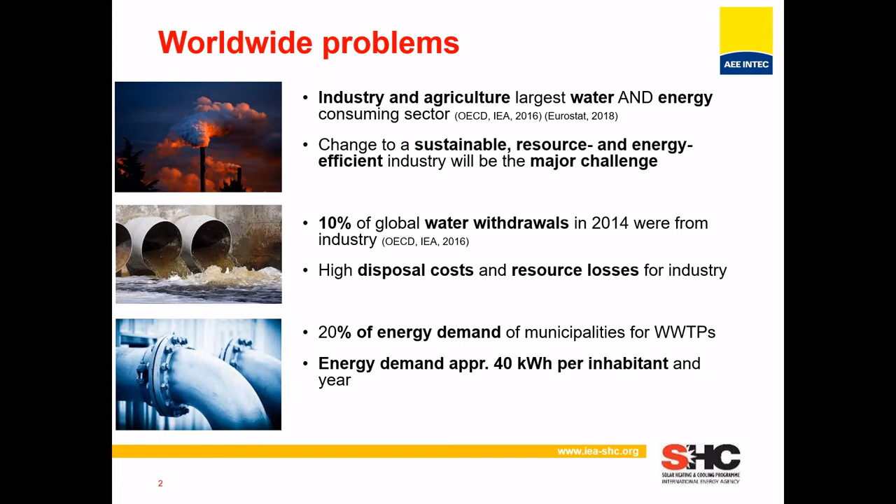An additional 10% of the global water withdrawals in 2014 came from industry, causing disposal costs, and valuable resources are lost during these withdrawals. Also, about 20% of the total energy demand of a municipality - a village, town or city - is allocated to wastewater treatment plants. That's about 40 kilowatt hours per inhabitant per year allocated to these plants. So we thought all these factors are very important to reduce energy demands and to reduce fossil CO2 emissions.

What are the main approaches we are dealing with in our network, within Task 62? On one hand, we see solar energy as a reliable source to reduce fossil CO2 emissions in different applications. We also want to create tools, a good ground to boost markets in solar thermal industry, but also in water purification industry. We have two approaches where we want to use the source sun in general.

On one hand, to use it in the solar thermal area, to use this thermal energy to run different technologies - water purification technologies, water separation technologies like membrane distillation, pervaporation, vacuum evaporation, etc. On the other hand, we also want to use solar photons to deal with or handle wastewater by applying technologies like photocatalytic water purification, decontamination, or disinfection systems. In my talk now I'll focus on solar thermal technologies.

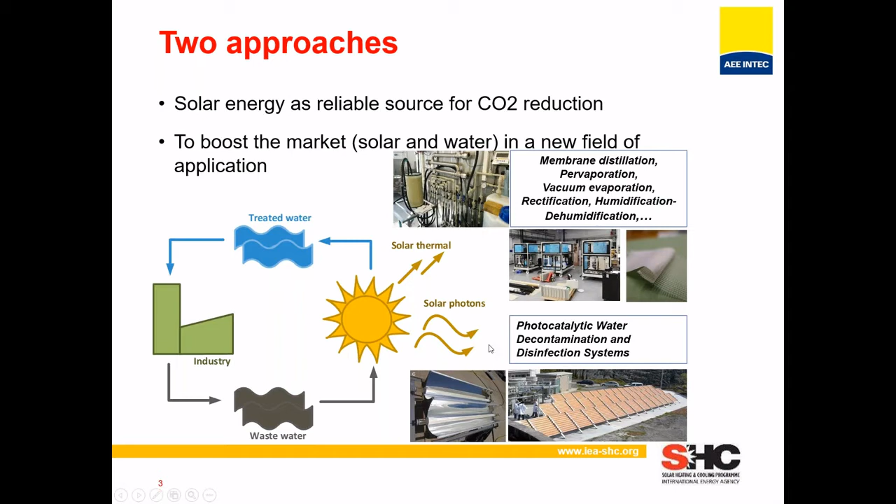After my talk, Isabel Oller, who is also involved in this task as one of the sub-task leaders, will speak more about the solar photon applications.

What are the targeted results? As I said, the title of the talk is this Nexus energy water industry, and the targeted results are also allocated to three areas.

In the energy, or solar, area, we want to develop new solar collector concepts. We want a strong link to solar collector suppliers and developers, so they get new market ideas, and to identify potential markets for the technology itself. On the water side, of course, water separation technologies, decontamination and disinfection technologies - to see how these can be linked with solar applications, and to recycle valuable resources out of wastewater.

And for industry, we want to identify emerging technologies which are not state-of-the-art at the moment but have big potential in the future. We want to create energy and CO2 savings, a guideline for stakeholders will be developed, and we want to identify different integration concepts.

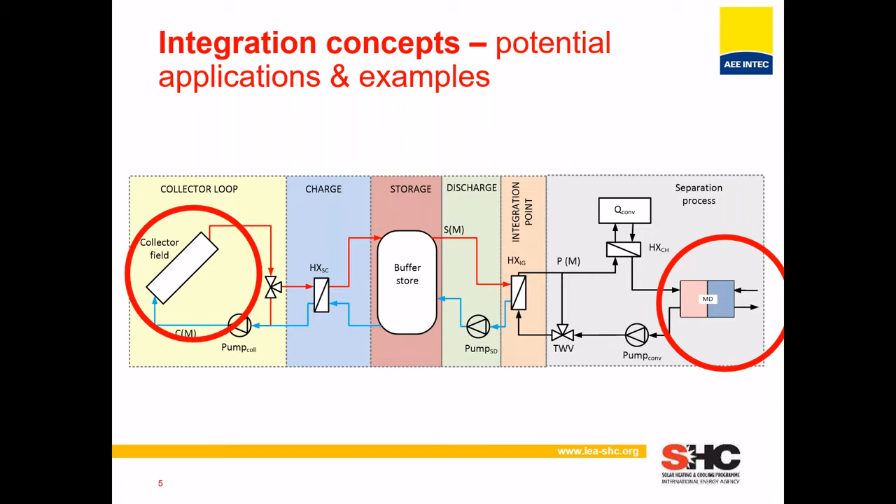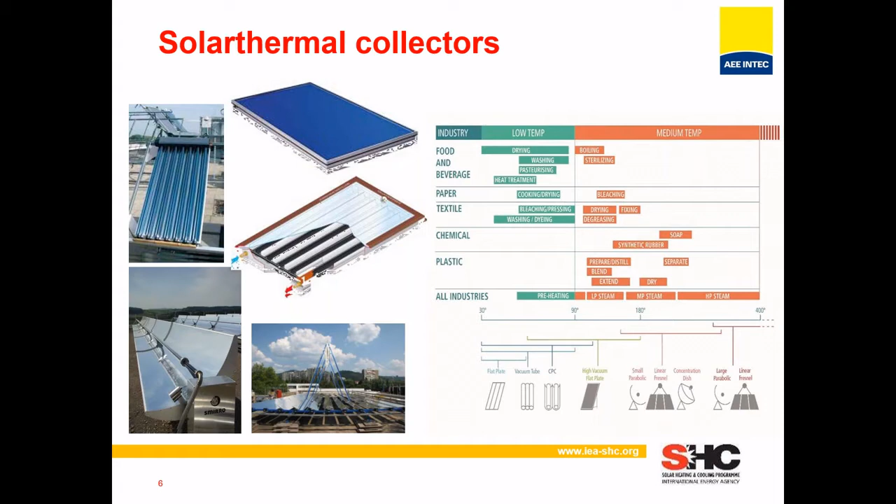For those who are maybe not so familiar with solar process heat, just to get an idea on different collectors which will be applied here. You see already developed collectors - flat plate collectors, vacuum tube collectors, but also concentrating collectors - different collectors applicable for different temperature areas. This is our focus, our technology on the solar side, what we have in our network.

But on the industry side, I think this is maybe not so well known. We identify different applications, different possibilities, different industry sectors where, at first approach, we have the highest potential - galvanic industry, to recover valuable metals, and also to recover acids. We see a big potential for this Nexus application.

Then textile industry, to treat wastewater, especially wastewater coming from the dyeing processes. The food industry, of course, on the one hand, to treat process streams like waste streams or milk streams, to concentrate them and generate, for example, whey powder or milk powder, or also to concentrate juice, but also to recover volatile aroma compounds in different products.

The bio-based industry, as a biorefinery industry, future industry sector - we see big potential to recover this combination of different separation technologies to recover ammonia, to use this as a fertilizer, but also maybe to use it as an energy vector. Additionally, to treat biogas sludge, and to recover ammonia, or to reduce other compounds in this sludge system.

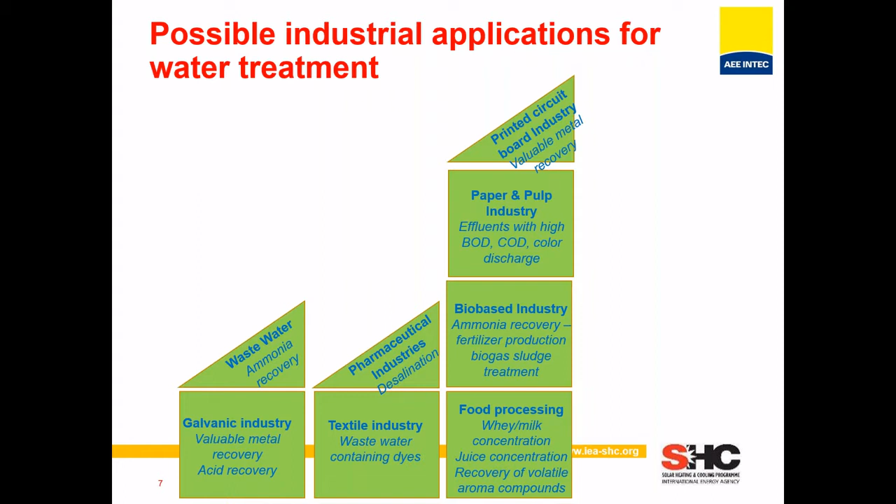Yeah, these are the different applications where we see a huge potential, and I just want to give you a few brief examples.

First example is for the galvanic industry. This is an example from an Austrian galvanic company, and the problem here is that this rinsing bath, or the passivation bath, is full of chemicals, and they get water additionally always into this bath, so they have to add chemicals to keep this concentration in the bath.

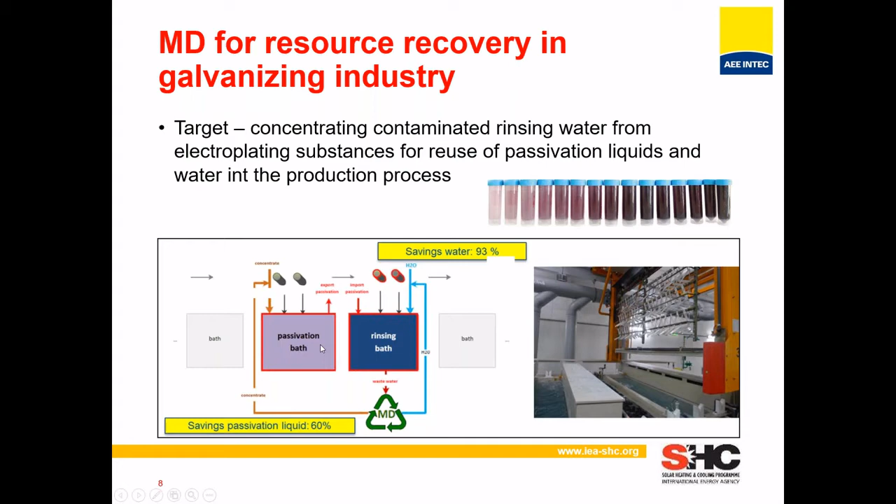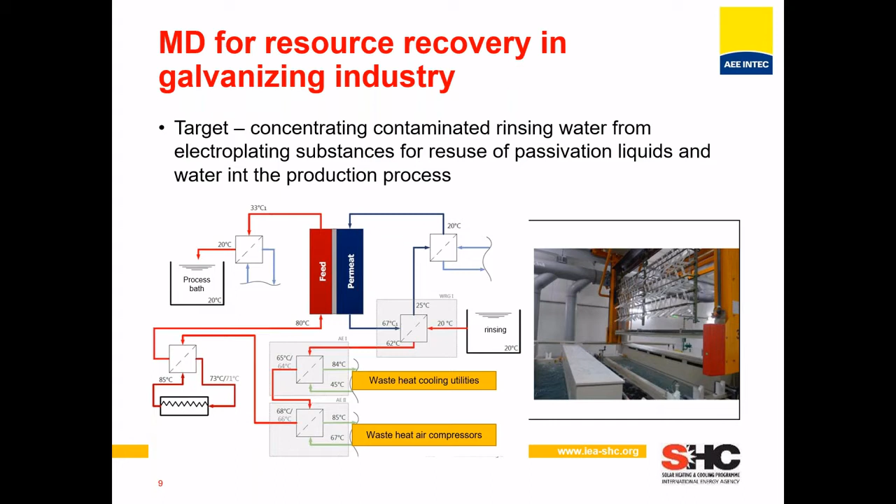We developed a concept, shown here, for how to continuously recover these chemical baths, to separate water out of this bath, generating water on one side, and keeping the concentration in the bath at a constant level. The idea was to combine this separation technology, done by membrane distillation, with waste heat on one hand, but also with solar applications on the other. The results are impressive: about 60% chemical savings and more than 90% water savings, which could be reached in this case study.

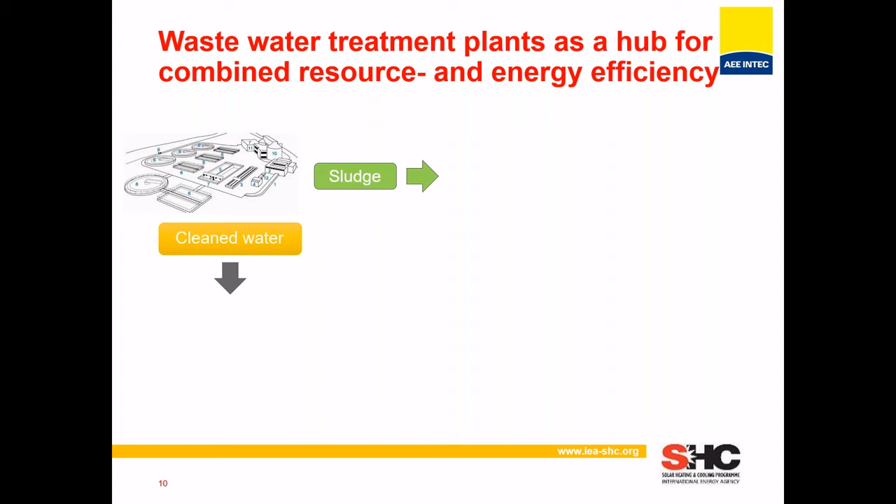The next example: as I told you, wastewater treatment plants are huge consumers, but also have big potential to be future energy distribution points for cities and municipalities. How could such integration of a wastewater treatment plant look like, to develop a concept where it's not a consumer anymore? Of course clean water is the most important part, but we also have sludge coming out of this plant. The clean water leaving the plant has a certain temperature left, and in combination with a heat pump and heat exchanger, a huge potential of energy recovery is possible.

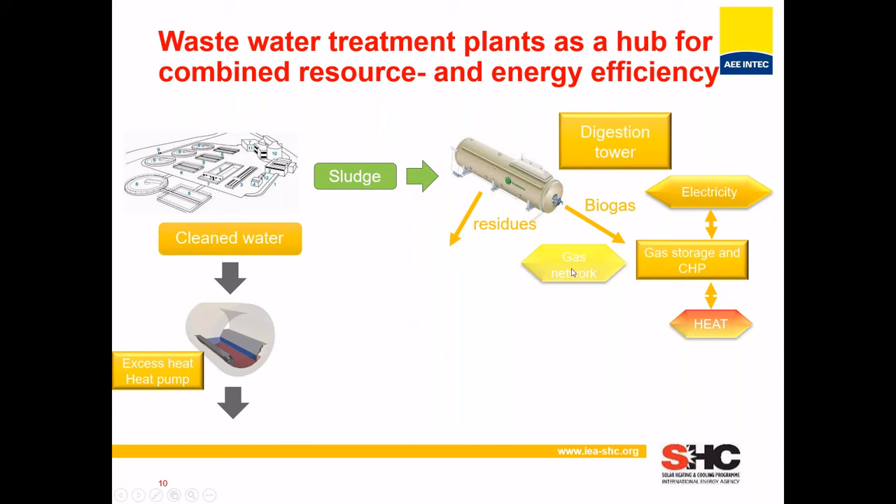The sludge is in most cases already treated in a biogas plant, in a digester tower. Here we have the biogas on one hand, but this is not used very often, and we have the residues out of this biogas plant. What can we do with the biogas? A CHP plant - a combined heat and power plant - can be used, or it can go directly into a gas network.

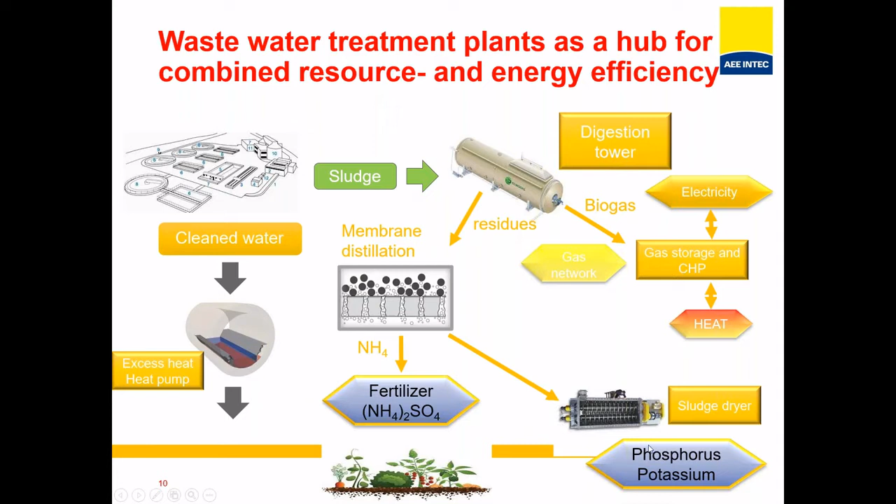Residues can be treated, as I told you already, for example, with a membrane distillation facility technology to create ammonia, use this as a fertilizer. The sludge can be dried and further, potassium and phosphorus can be recovered in this form.

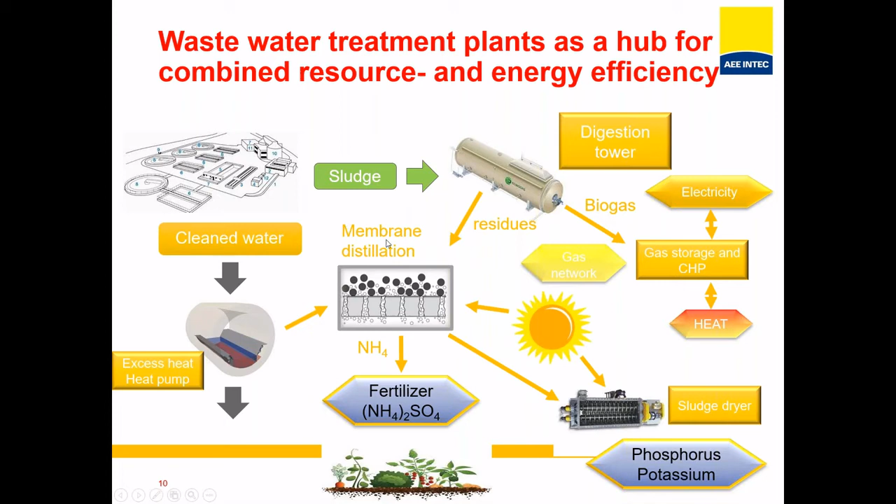And you can see here, solar applications can be applied here in the membrane distillation facility, but also as a solar dryer. It is not only theoretical.

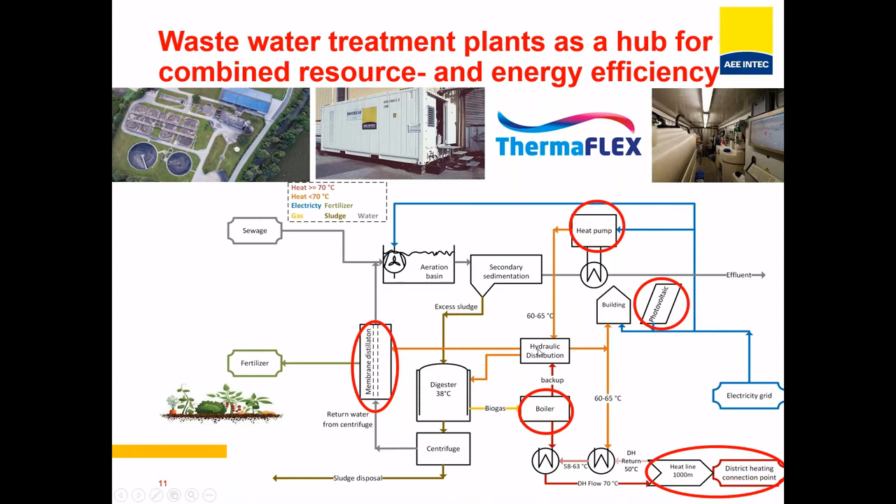We are working here on a pilot plant at the wastewater treatment plant, where, as you can see here, this concept is created with different applications similar to what I showed you before. Here's the heat pump, photovoltaic, membrane distillation, the boiler, and using also the heat for the district heating part.

What is important? What can you reach with such a concept? You can reach up to 20% electrical savings. The yield of biogas can be increased up to 30%, and additionally quite a substantial amount of fertilizer can be produced by separating the ammonia from the sludge.

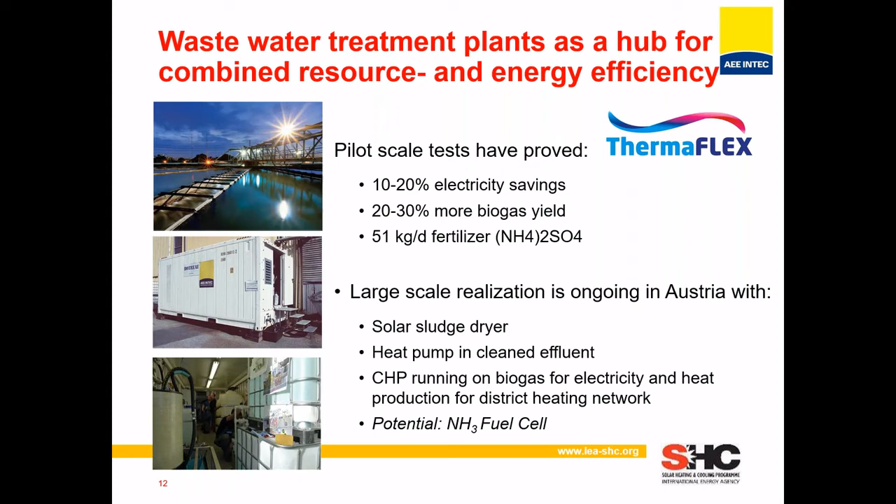And this combination with a solar thermal sludge dryer, heat pump, CHP, and additionally the ammonia can be maybe converted into energy in a fuel cell. So different possibilities. This pilot plant is at the moment in erection and will be implemented in an Austrian wastewater treatment plant.

Coming also to a wastewater treatment plant with additional applications. This is the project Greenlysis, which combines separation water technologies to create hydrogen and oxygen out of the wastewater. It's from a European project, led by a Spanish company and the University of Barcelona.

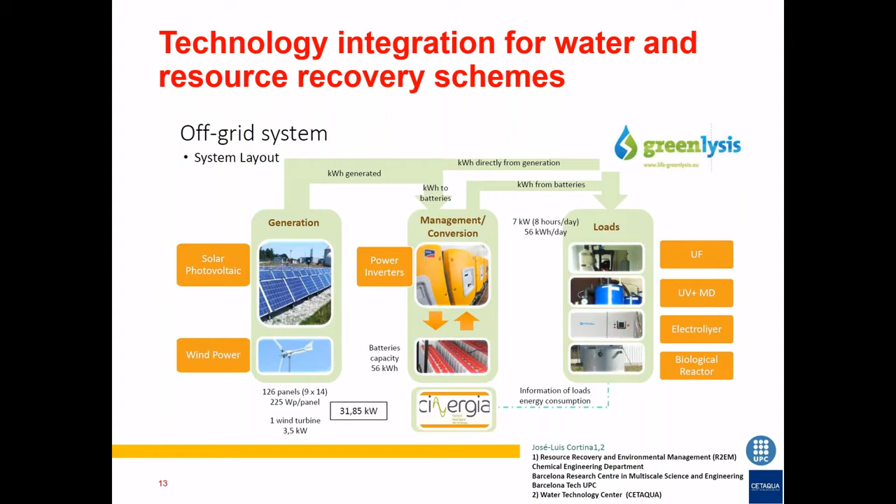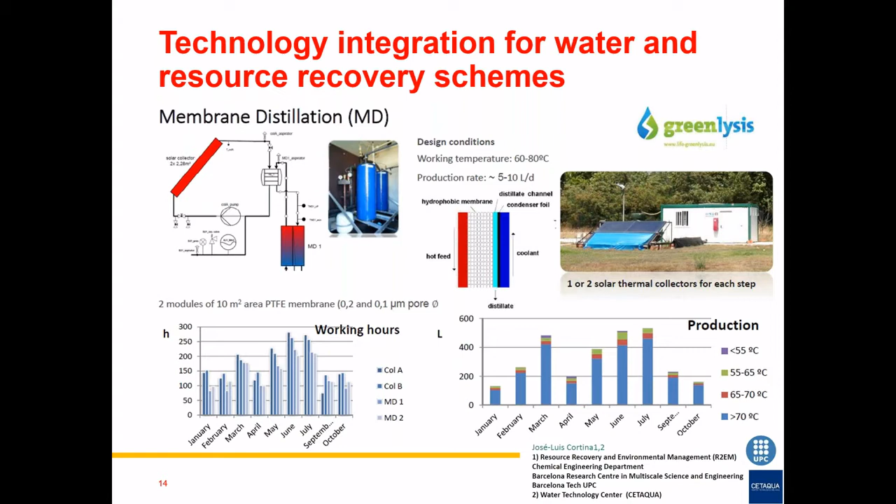With this combination of wastewater pre-treatment, wastewater purification, with electrolyzers implemented, with solar photovoltaics, wind energy, but also solar thermal, together with a membrane distillation facility, which also treats the effluent water out of the wastewater treatment plant, hydrogen and oxygen should be produced, with the potential to integrate this hydrogen in, for example, a methane network. Another quite interesting technology or product is a solar panel or solar collector.

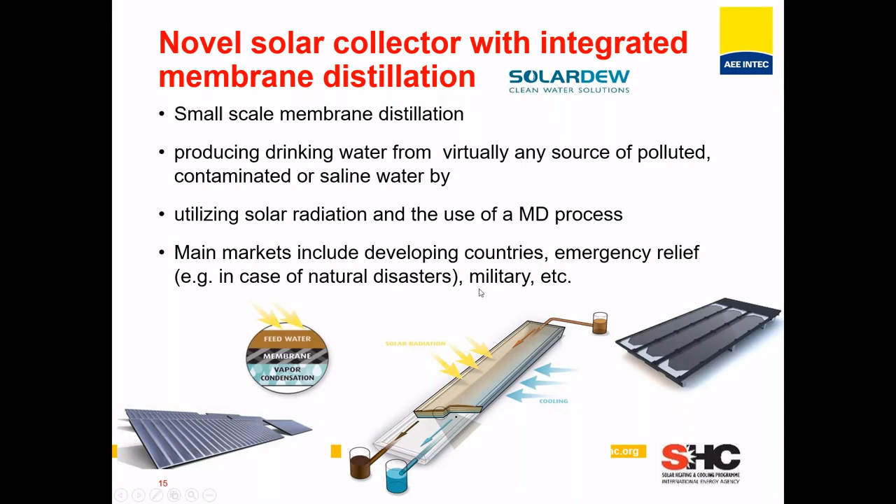The idea here, this product, which is from SolarDew, is to produce drinking water in developing countries, emergency areas, but also for military applications.

My last example is a combination of solar concentrating systems, Fresnel collectors from the company Rioglass, supplying the energy from these concentrating systems for a vacuum multi-stage evaporator, which is a pilot plant running in Spain for wastewater from copper mining applications, as you can see below.

And it is interesting, especially because also here, similar to SolarDew, it is on a modular design basis, so it is easy to scale up such systems on the solar side, but also on the evaporation side.

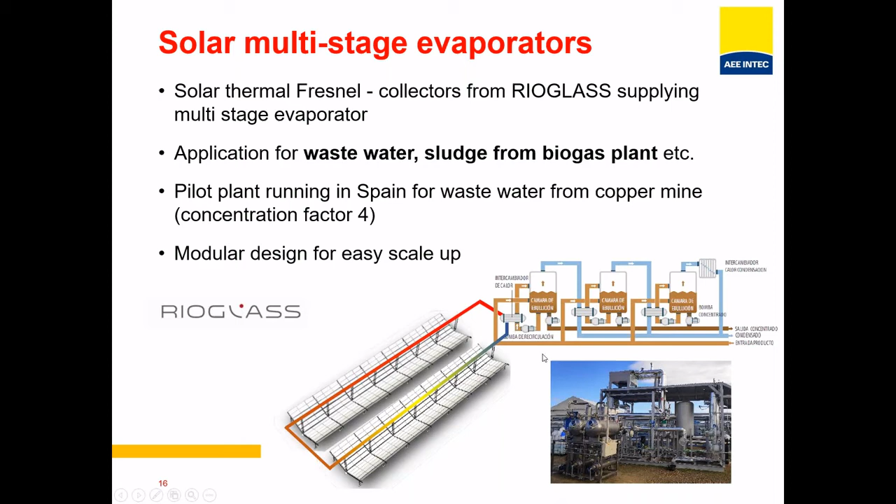Coming to my last slide, what are up to now the most important findings? The nexus of energy, water and industry is very important. I showed you the numbers in the beginning. It's a very important future topic and future strategy to reduce CO2 emissions.

Wastewater treatment plants are promising energy and resource sources. It means it's not needed anymore that they just consume energy. They can produce energy, and they can also produce valuable resources like ammonia or potassium.

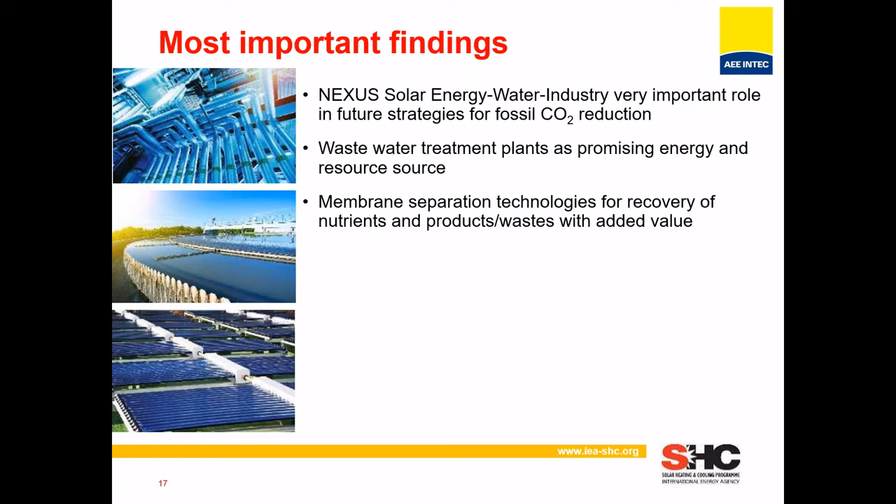Membrane separation technologies for recovering nutrients and other products out of wastewater could be identified and will be under future research, to really select the right technology for the right applications.

New solar thermal collector concepts will be needed, but there are some already on the market, like I showed you with SolarDew. Then also, of course, decision-making guidelines and tools will be important for the future, to disseminate these activities and reach further industry and applications.

And of course, as usual with new technology, best practice examples are very important in order to boost these new realizations and these possibilities, as shown here with some of these examples.

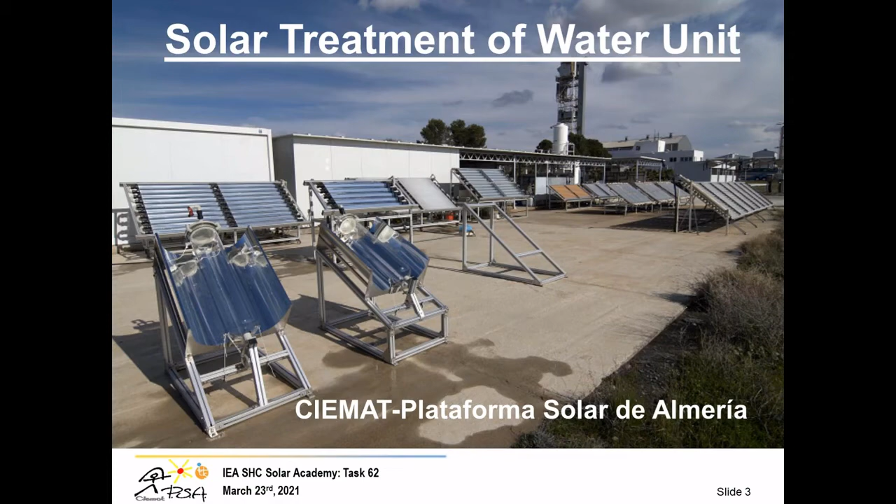I'm the head of this unit now, and these are some of the lines that I would like to share with you that we are focused on in research and development. As you can imagine, like the rest of PSA in research, we are focused on being in the middle between lab scale experiments and demo site experiments and going to the market technology.

We try to focus on solar photocatalytic and photochemical processes as tertiary treatment for removal of pathogens and pollutants in urban wastewater. But we also have a strong research line focused on the integration of advanced oxidation processes and other conventional or advanced technologies such as membranes, ozonation, for hazardous pollutants and pathogens removal from industrial wastewater, while always trying to focus on reducing operating costs and improving water treatment efficiency.

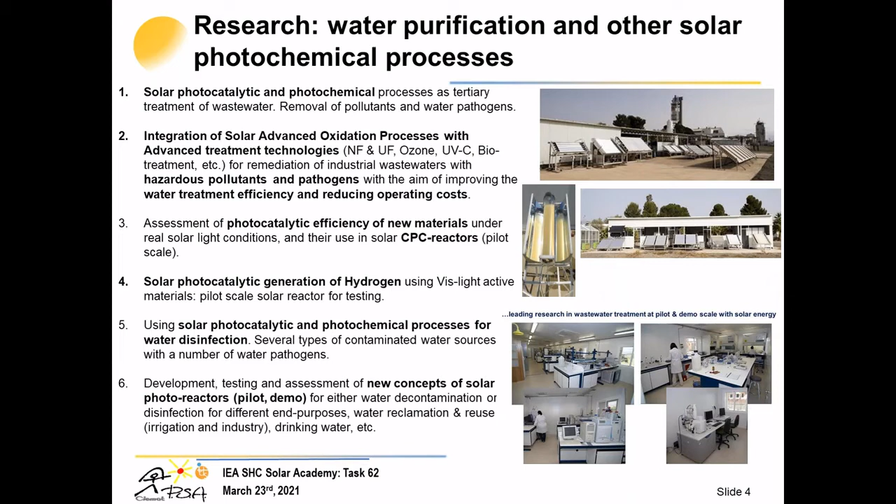We are also focused a lot on trying to develop, design, and test new concepts of solar photoreactors at pilot or demo scale, either for water decontamination and disinfection or for reuse purposes. As you may know, we are living in the southeast of Spain, so we have a lot of water scarcity problems.

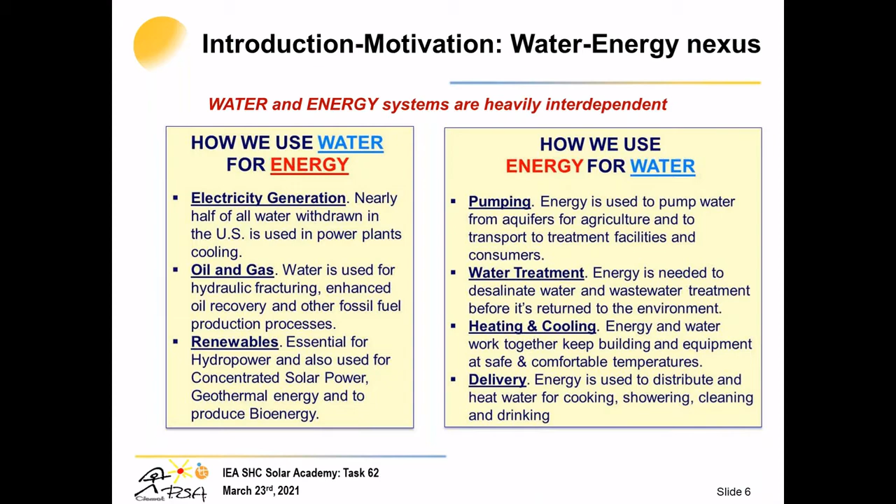So as all of you know, we have the water energy nexus as quite an important issue nowadays. Of course, we use water for energy production. This is something not everyone knows, but we also need energy for water. We need water for producing electricity, even for some renewable energy sources. But we also need energy not only for pumping water or heating and cooling systems and delivering water to the municipalities, but also for water treatment issues.

Indeed, we must know that the water-energy binomy is always present, so problems on one side are always problems on the other side. But there is an important and clear coincidence in the existence of water problems, normally in arid and semi-arid zones in the world, and the availability of abundant solar radiation, which allows us to apply water treatment technologies based on solar energy in those zones.

Of course, we are speaking about these semi-arid or arid zones in which water scarcity is mainly the focus, but we have also problems of water quality, though not quantity, in the north of Europe. So the water technologies I'm going to introduce you are also valid for improving water quality in North Europe, for instance.

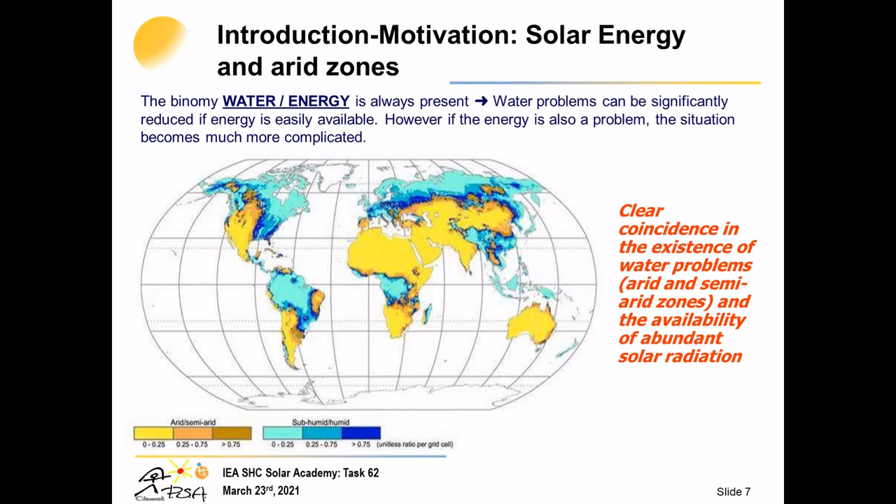But it is not only an issue of water-energy nexus, but also an issue of water-energy-food nexus. I would like to leave you a few words on how the water-energy nexus also affects food. These three sectors are intimately related, and we try to connect all of them always.

And regarding food, nowadays almost 800 million people suffer malnutrition in the world, and it is expected to even increase more because the population in the world is increasing exponentially, as all of us know.

It is also interesting to know that we don't need water only for drinking and for ourselves, but we also need water for producing food. Indeed, for instance, we need 3,000 to 5,000 liters of water to produce 1 kilogram of rice. So it's quite important to always consider this link between these three topics.

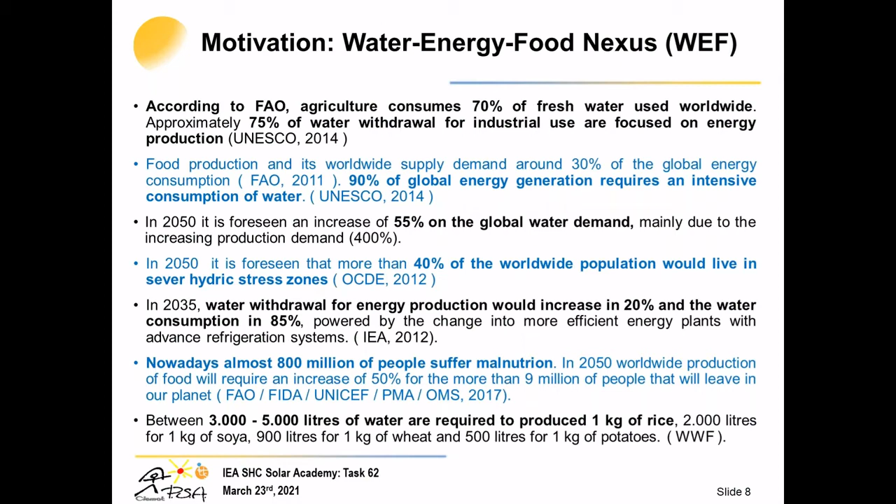Regarding industrial wastewater, which is one of the main contributors to contamination, we know that specific non-biodegradable or recalcitrant contaminants found in industrial wastewater cannot normally be treated by conventional wastewater treatment plants used in urban sites. This causes problems of accumulation of persistent contaminants, even problems in the normal operation of these wastewater treatment plants, and of course low efficiencies due to the toxic or biorecalcitrant nature of the compounds.

So it is important to control the process, but it's also important to speak about and find alternative treatments. Normally, it is necessary to combine and integrate different oxidation processes to improve the biodegradability of industrial wastewater, combining them with biological systems, which are always the cheapest option. Finally, combining both approaches, always trying to focus on a life cycle assessment and health risk assessment, depending on the final use we want for this industrial wastewater once treated—because it can always be treated to a high quality, to be reused not only in the industrial process itself, but even for other purposes in the city, or for irrigation, for instance.

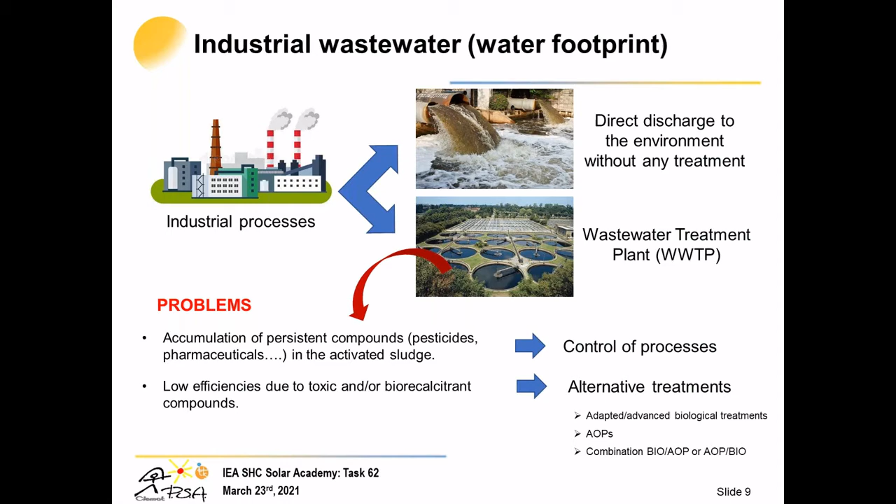But another problem we have is water microbial contamination, because in water, including industrial wastewater, we can find pathogens, bacteria, viruses, protozoa, and in recent days we are facing the problem of antibiotic-resistant bacteria and genes.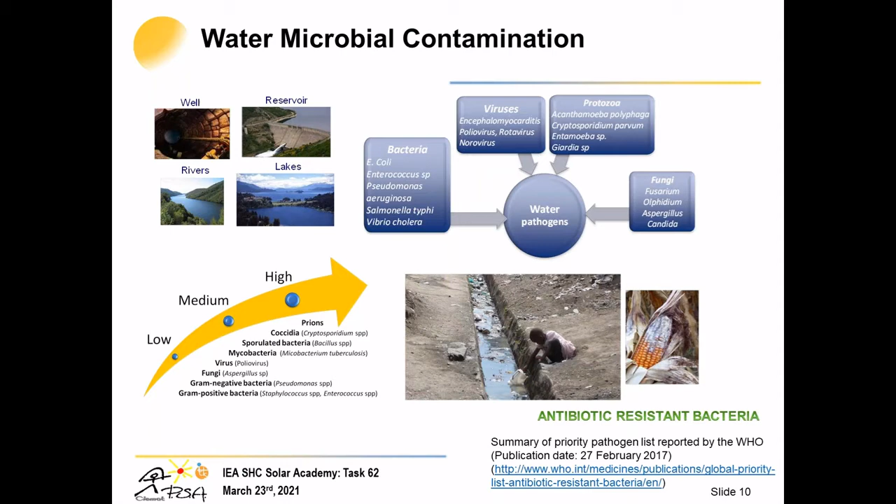In this sense, following the line of Christophe's talk, what we propose are advanced oxidation processes that can take profit of solar energy. These advanced oxidation processes are near-ambient-temperature and pressure water treatment processes. They normally involve the generation of hydroxyl radicals, which are highly powerful and non-selective.

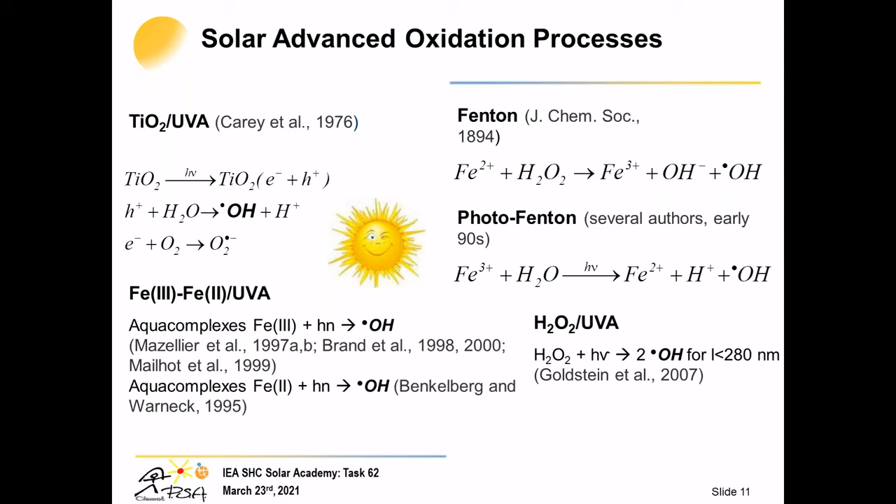So it's always even more difficult trying to combine the thermal and the photon side of this solar energy to take profit for industrial wastewater treatment.

After this physical-chemical pretreatment, we must be clear on how biodegradable and how toxic our industrial wastewater is. Because if it is toxic or non-biodegradable, we cannot go directly to an advanced biological treatment or biological treatment. So we must try to improve the biodegradability of the wastewater through an oxidation process.

It could be a photo-Fenton process, according to the previous slide, which is based on iron and hydrogen peroxide for the production, in a homogeneous phase, of hydroxyl radicals. We can go through ozonation or UV pilot plants, which are more commercially available in the market, or we can go to electro-photo-Fenton or electro-oxidation systems.

But as soon as possible, these oxidation systems are only used to improve the biodegradability enough for going to an advanced biological treatment or to a biological treatment.

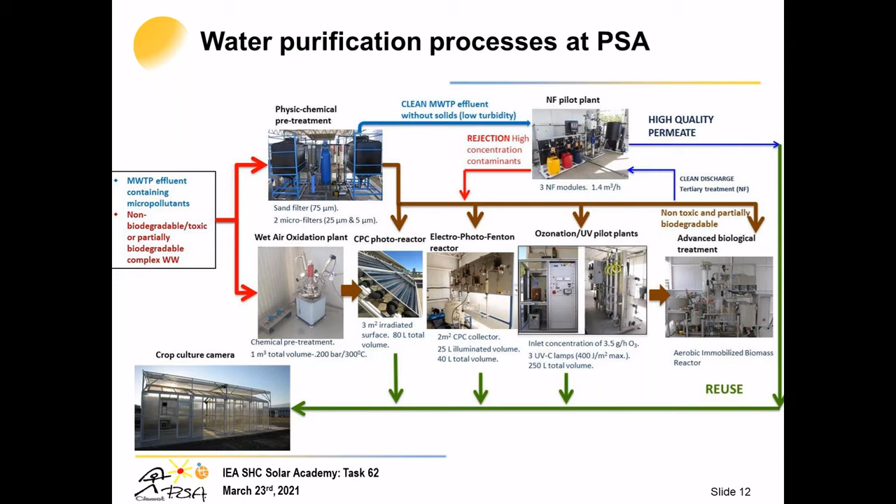So just to present a little bit about the solar photoreactors themselves for this kind of application, some parameters that we must take into account for the design: they must have an efficient distribution of the UV radiation, as we are using the UV, not the thermal part of the solar energy, as I said.

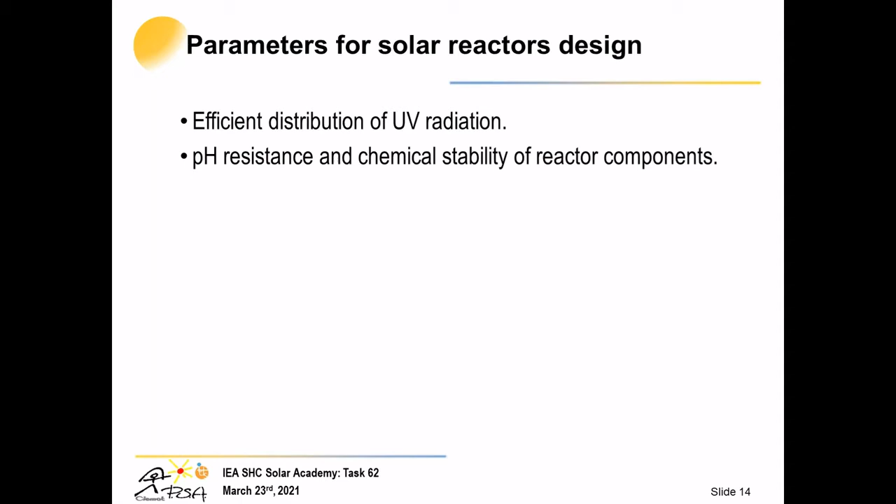They must have pH resistance and chemical stability, because if we are dealing with industrial wastewater, it normally could have an acid or basic pH, so we must be careful about the kind of materials that we use.

The flow must be guaranteed because we need to have maximal homogenization, normally a turbulent regime. It must be resistant, because though we are not concentrating the radiation, if you are in summer you can attain temperatures almost higher than 50 degrees, so it must be resistant.

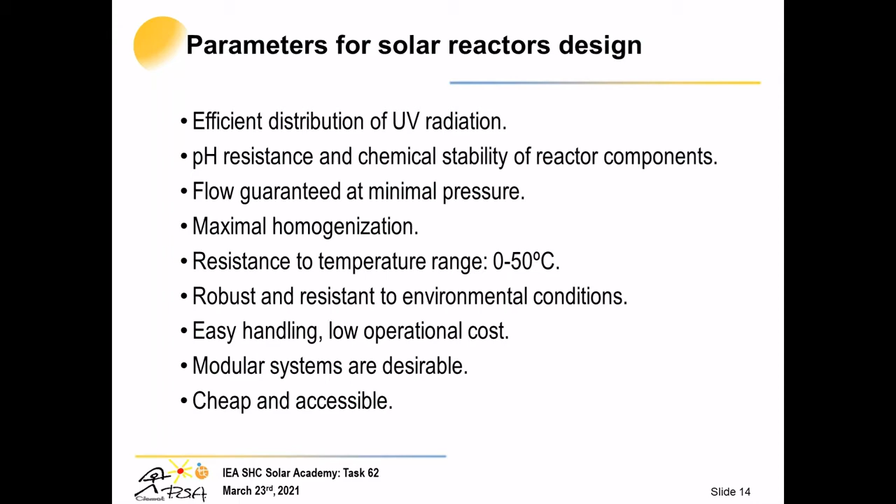They must be robust and resistant, of course, to the environmental conditions. They always need to be easy to handle and have low operational costs. Modular systems are always desirable and, of course, as cheap as possible and accessible.

So now I'm going to present the compound parabolic collectors, which are the most studied photoreactors designed for advanced oxidation process applications. These are static collectors with a surface following an involute around a cylindrical reactor tube. So this is the cylindrical reactor tube, and we have the double involute here.

So the light is reflected by the CPC and is distributed all around the tubular receiver, so that almost the entire circumference is always receiving radiation, wherever the time of day, as you can see in the slides, in the pictures.

So the CPC has a concentration factor of 1, so it is not a concentrated system, and can make highly efficient use of both direct and diffuse radiation. This is an advantage for us, as when we have a cloudy day, we can also take advantage of the diffuse radiation and still perform our experiments and treat the water.

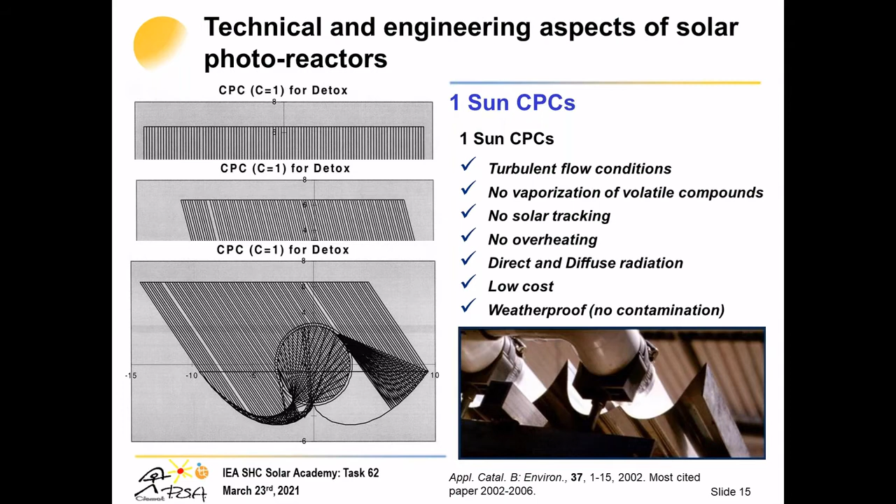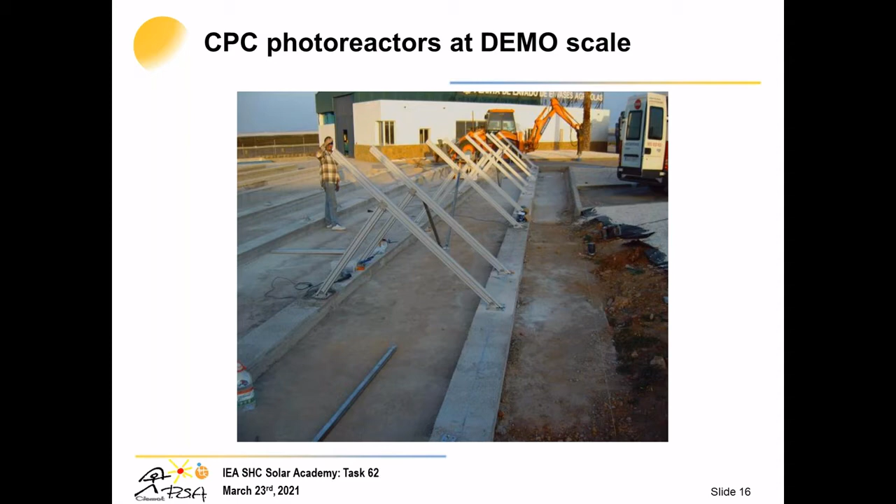Of course, they also have high optical efficiency and high quantum efficiency, which is quite interesting. This kind of photoreactor has also been erected at demo sites, and indeed Christophe showed one picture of one of them in his presentation. Here I show you several pictures of the company that constructed these CPCs.

I will show you a few more details, but another important thing I want to stress in this slide is the row separation. We must take into account that we are facing south, and depending on our latitude and where we are, we must account for the shadow we might cast on the other module of the CPC. So this is an engineering consideration.

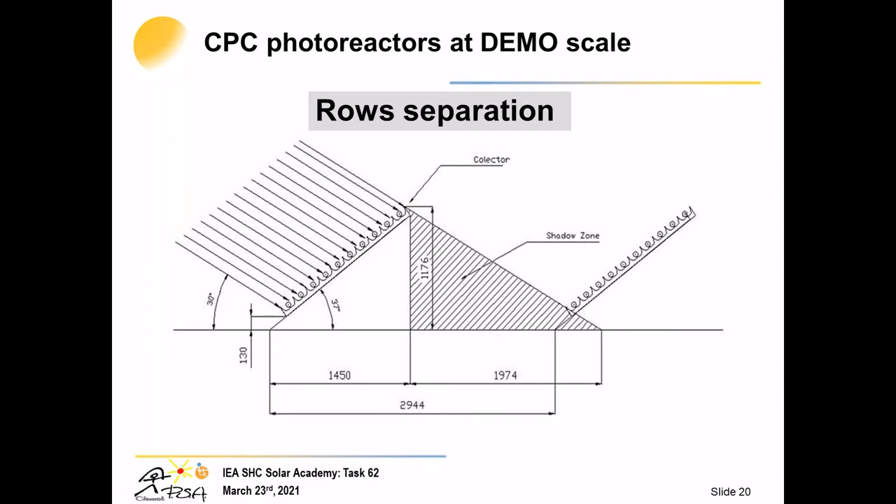So this is the final picture of the pilot demo site that I've been showing in the previous slides. It's around 100 square meter modules of the CPC.

This has been installed in a company in which we wanted to treat the wastewater coming from the rinses of the pesticide sprayers that were used for the crops, the pesticides in the crops here in Almeria.

Here we have how we calculate the area. We are always focusing on trying to determine the minimum UV radiation that we require for treating the amount of wastewater. With that, we design the surface that we need for the compound parabolic collector modules. We already have demo scale systems on this.

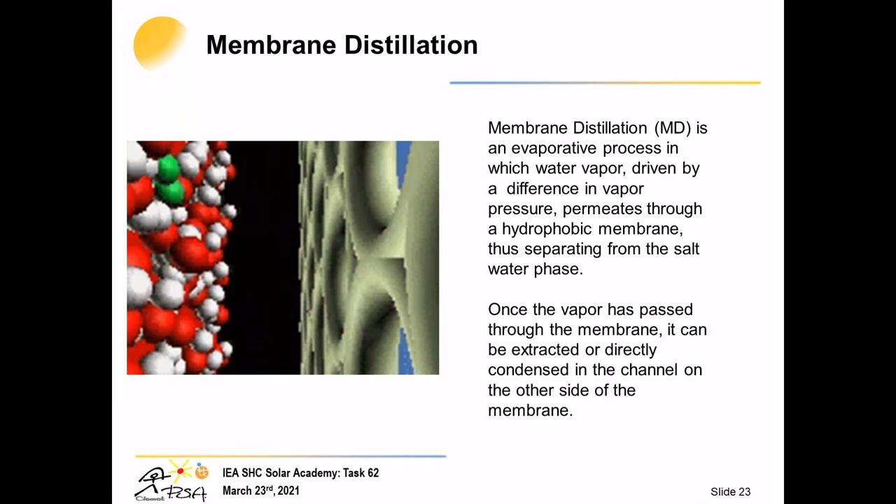I'm not going deeper on this because the nutrients recovery has been explained by Christophe. In the case of membrane distillation, we are always speaking about taking advantage of the thermal energy coming from solar radiation. But we can also recover the ammonia.

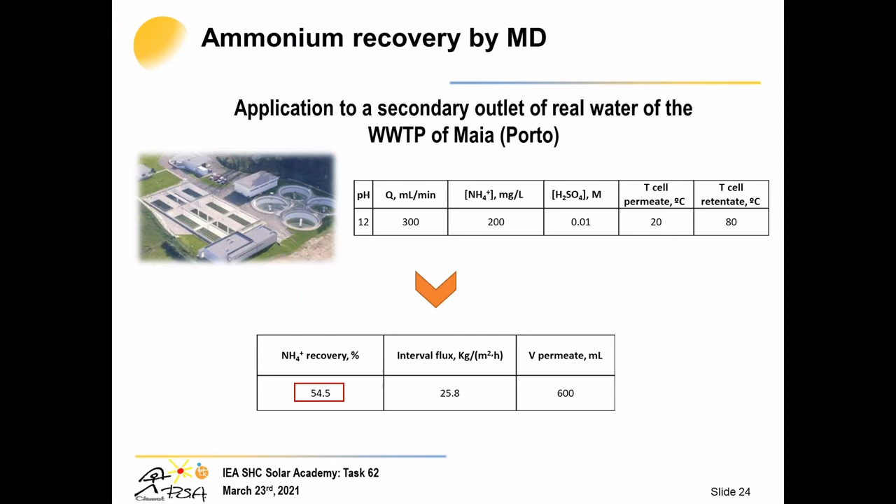As far as I know, good recovery of ammonia is obtained at lab scale, though at pilot scale it's still under development, and also demo scale, as Christophe showed us in several European projects. So let me use a few minutes to show you some examples.

These are typical industrial wastewaters, let's say from our side, landfill leachate. We can have different landfill leachates depending on the landfill site, it could be urban, but it could also be industrial. So we always try to give a treatment line in which we combine the physicochemical pretreatment, as I told you before. In this case, we did a conventional physicochemical pretreatment.

We attained a good reduction in color, which is necessary if we're going to apply a solar treatment afterwards. We did an initial dosage of iron 3 that favored the coagulation, but it was also favorable because we had a remaining amount of 56 milligrams per liter of iron, which allowed us to perform photo-Fenton processes without extra addition of iron. So we used what was initially required for the coagulation and flocculation system.

Finally, we tried to improve the biodegradability and reduce the toxicity, attaining a reduction of toxicity from something like 85% to 14%, and we improved biodegradability. This is only an indicator: as soon as it is higher than 0.3, the wastewater is highly biodegradable. So finally, we combined the physicochemical pretreatment with a solar photocatalytic photo-Fenton process, followed by a biological treatment.

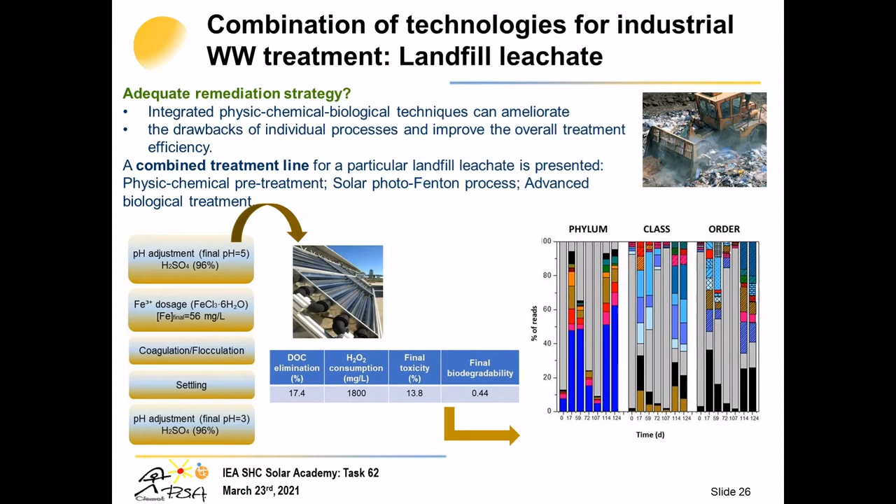This is a picture obtained by genetic analysis. Here, it's important to know that what we observed is that we had Proteobacteria, a kind of bacteria that includes a wide variety of pathogens, such as E. coli, Salmonella, or Vibrio. These were the main microorganisms that were increasing in this adapted biological treatment.

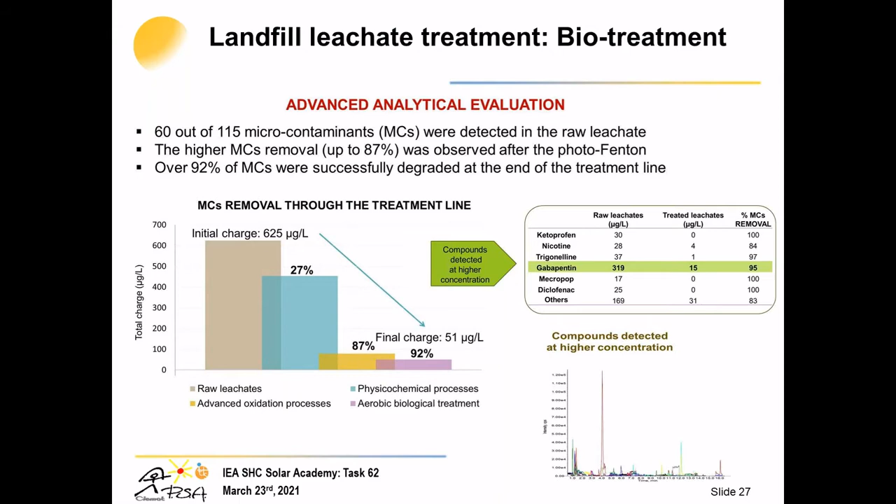So it's quite interesting that we can also apply advanced analytical tools to check which contaminants were initially present in the raw wastewater. And if we combine liquid chromatography with mass spectrometry, we can identify unknown microcontaminants, and also evaluate how we eliminate them in the different steps of the treatment system.

Isabel, can you come to an end, please?

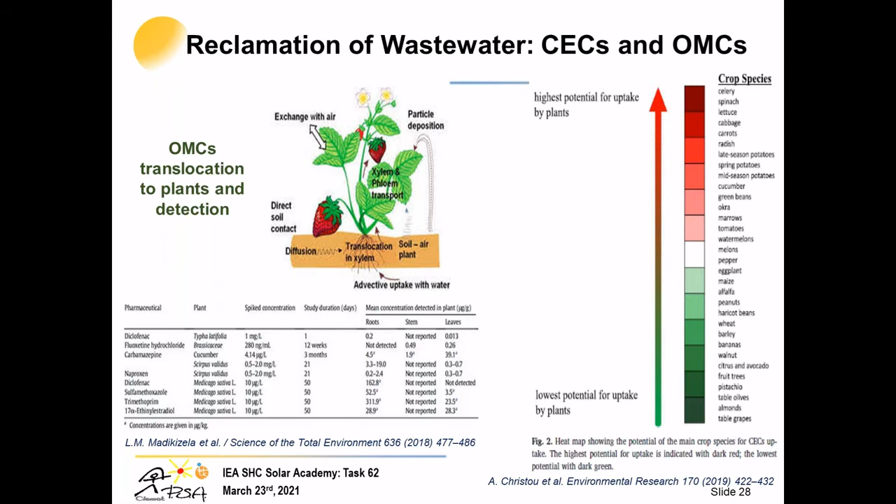Thank you. Yeah, it's only two slides more, just to let you know the importance of the presence of microcontaminants in the effluent when we want to irrigate crops. Here I want to leave you a few reports on that, showing the potential. It's only to show you how we treat with this system: solar energy with hydrogen peroxide and also iron for the production of hydroxyl radicals.

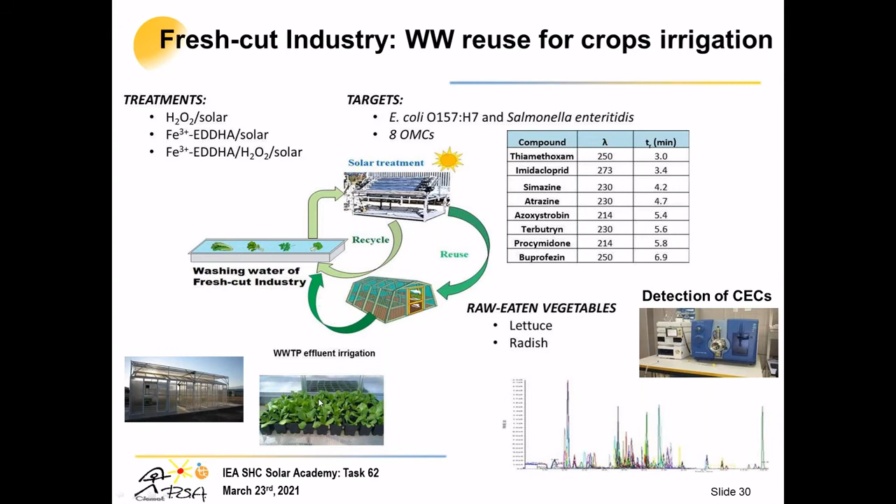And then we can reuse the own wastewater, even eliminating disinfecting and eliminating the salmonella and the E. coli. We can reduce vegetable crop irrigation issues, and we can eliminate the presence of these contaminants in the water, so we can irrigate without problems.

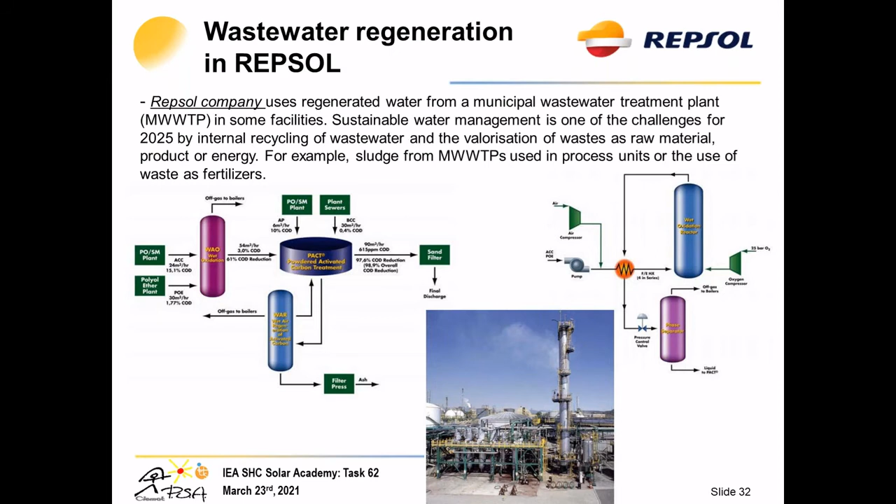This is the example of Repsol, just to let you know that there are some industrial companies that have their own wastewater treatments. We have a deliverable in task 62 where you can revisit these examples of industrial companies investigating their own wastewater treatment plants.

Finally, the key message I want to leave you with is how efficient solar advanced oxidation processes can be for all kinds of industrial wastewaters. But we must always be careful to ensure a safe reuse of the wastewater depending on the final purposes, and always do a life cycle assessment and a health cycle assessment to decide the best treatment technology.

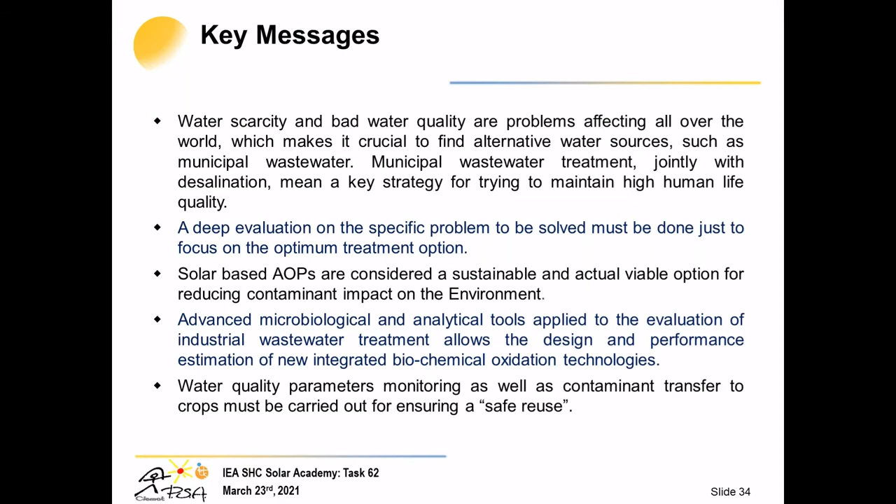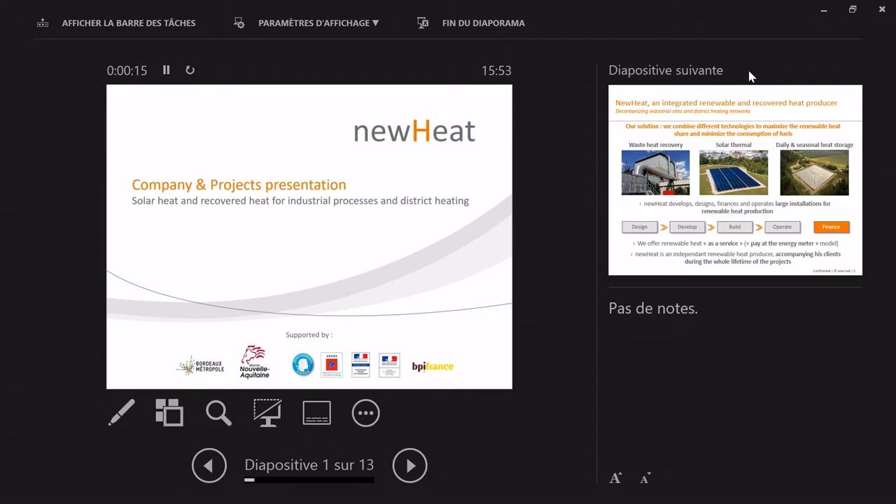I would like to thank you also, Christophe and Isabel, for their presentations, it was really interesting. In my presentation, I would like to show you a bit of newHeat company and the projects we develop first, and then I will end with the R&D project ReMiniWater that addresses solar-powered water reuse and resource recovery in the mining industry.

So, okay sorry, I can't move my screen. newHeat is an integrated renewable and recovered heat producer. Our solution is to combine different technologies to maximize the renewable heat share and minimize the consumption of fuels.

As you can see with those three pictures, we want to combine waste heat recovery, solar thermal, and daily and seasonal heat storage to address the needs of our potential clients. That can be industrial processes, district heating networks, or even greenhouses.

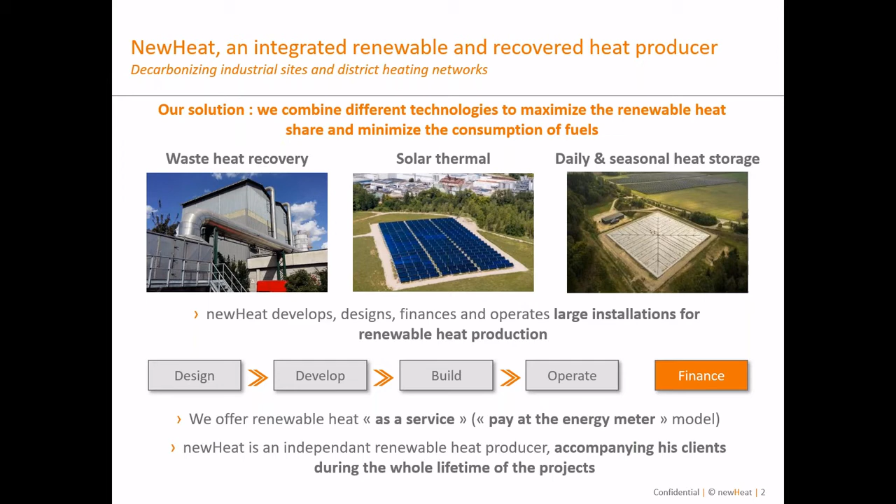Once the need of the client is well defined, we can enter the design phase, to really propose something to the clients that could be a good solution for their needs. Once we have finished the design, we can follow with the manufacturing phase and also the operation, because newHeat, as I said before, covers the whole lifetime of the projects: first manufacturing the solar plant, and also operating it, because newHeat will invest in the plant. So we are the owner, and the client doesn't have to invest in anything before we sell them the heat.

Then I will present a bit of our technical know-how. Our know-how is to design tailor-made solutions to ensure competitive heat price with a secured and metered energy delivery. We first define the most robust, efficient integration to industrial processes or heat networks, and then we select the most appropriate technologies and optimize the sizing of the production units.

The technologies for newHeat are mostly flat plate collectors. We use direct and diffuse irradiation to heat water. For the flat plate collectors, we can either use fixed collectors or tracking systems, to follow the sun throughout the day.

And finally, we design and execute an optimized control strategy for complex heat systems, in order to really supply heat to the demand according to the sun resources, and also to the demand of the client that can change throughout the day and throughout the year. The problems of overproduction can be dealt with heat storage.

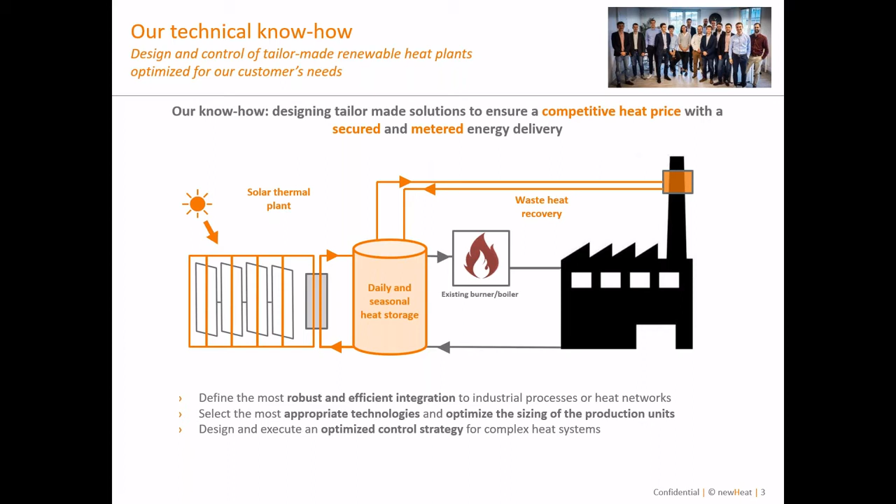In this slide, I will present the key benefits for our customers. First is to reduce the energy bill, because our clients have a specific heat price depending on the gas or fuel they use to heat their processes. Also, as we use solar thermal solutions and other renewable heat production systems, the idea is to decrease their CO2 emissions. We don't entirely suppress it, because as we use solar energy, we are really dependent on the day and on the solar resource. So in general, the current boiler is conserved as backup when needed, but its fuel consumption is deeply reduced.

Also, we stabilize energy costs for the clients. As you can see on the left of this slide, this graphic represents the heat price for the customer with fossil fuel, comparing to the newHeat price. As we sell our solution to clients for 15 to 20 years, we can really smooth the price so the client can have great sight on what he will pay throughout the next 15 or 20 years. And as newHeat is the project investor, the client doesn't have to invest anything, and the heat is delivered to the client thanks to a heat purchase agreement. So everything is borne by newHeat - the study, the investment, and the operating cost.

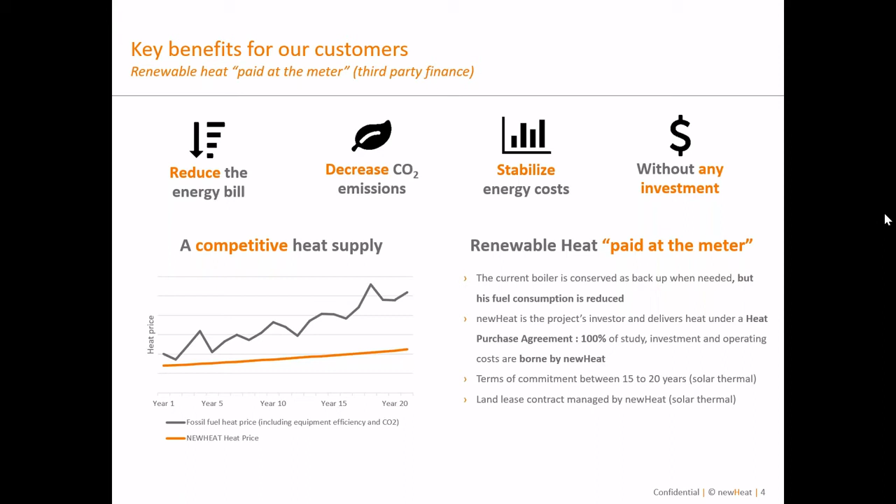Just to present some recent news, we achieved a really important step for the newHeat company that demonstrates the competitiveness and robustness of newHeat's approach and projects. We closed a bank fundraising for 5 solar thermal and recovered heat assets for 28 thermal megawatts, and 15 million euros of total investment. This fundraising is

thanks to two specific investors. First, it was some banks who financed this fundraising - Triodos Bank and Crédit Coopératif - but also some regional funds, 3 regional funds from France for 2 million euros total budget.

This means a lot for newHeat because it really emphasizes that our business model and the work we do is recognized and is worth it, because as a company, we really want to not just propose some new technologies to the clients or new solutions in renewable heat, but also to be competitive against fossil fuel consumption. So it's really meaningful for us.

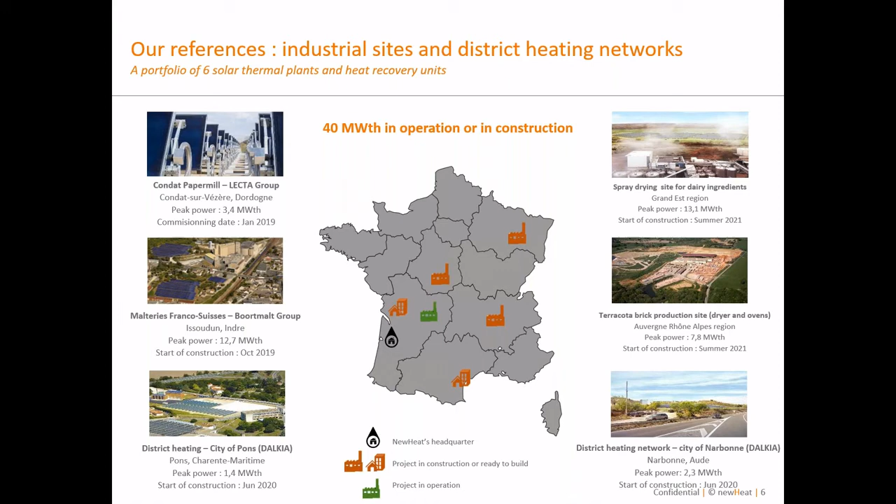Okay, so if we go in more detail in this project, the Condat paper mill is the world's first large solar thermal plant using FPC with tracking systems. These collectors will follow the sun throughout the day.

Production started two years ago, and as we've seen over the last two years, it's been meaningful for us because it's working quite well, even though demand on the site has been quite variable, notably due to the coronavirus crisis.

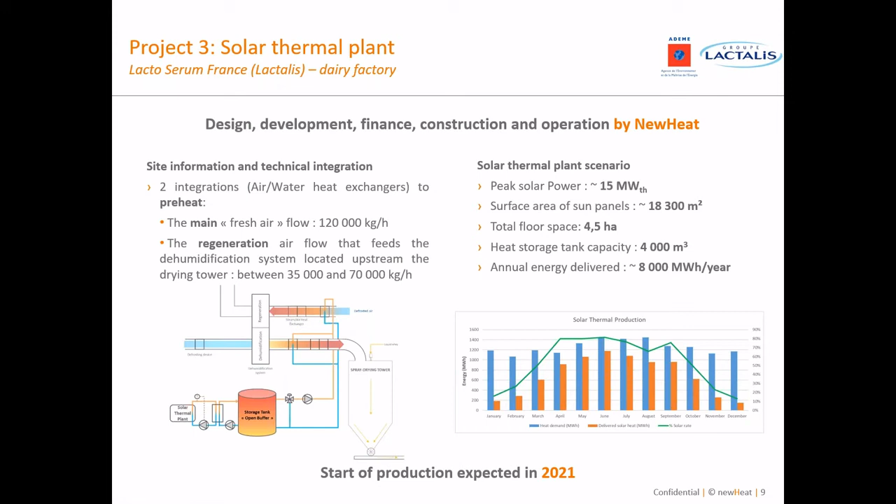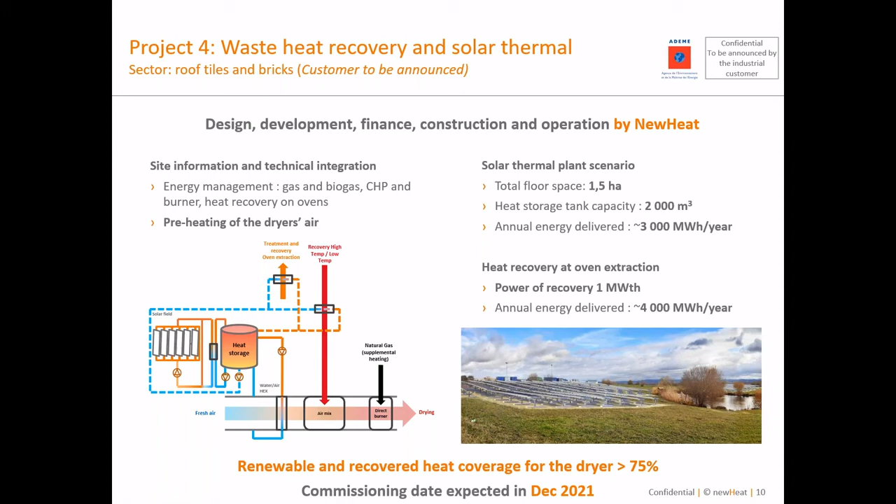The renewable and recovered heat coverage for the dryer should be higher than 75%, so we will address most of the heat required by the plant. The commissioning date should be at the end of 2021. Now that I've presented NewHeat and some of our projects, coming and already operating, I'd like to present the REMINE Water project.

It's an R&D project in which NewHeat is taking part, about solar-powered water reuse and resource recovery in the mining industry. With this link, you can check more information if you're interested, plus some basic information about the project.

The funding is from the European Union's LIFE program funding instrument. The budget is around 1,800,000 euros, and the duration is 2 years, starting October 2019. This project will end at the end of this year. There are 4 partners for this project.

Two partners are from Spain: Cetaqua Water Technology Center, and Matsa, which is a mining company the project is building for. There's also an institute from Poland specializing in non-ferrous metals, and finally NewHeat is participating in this project.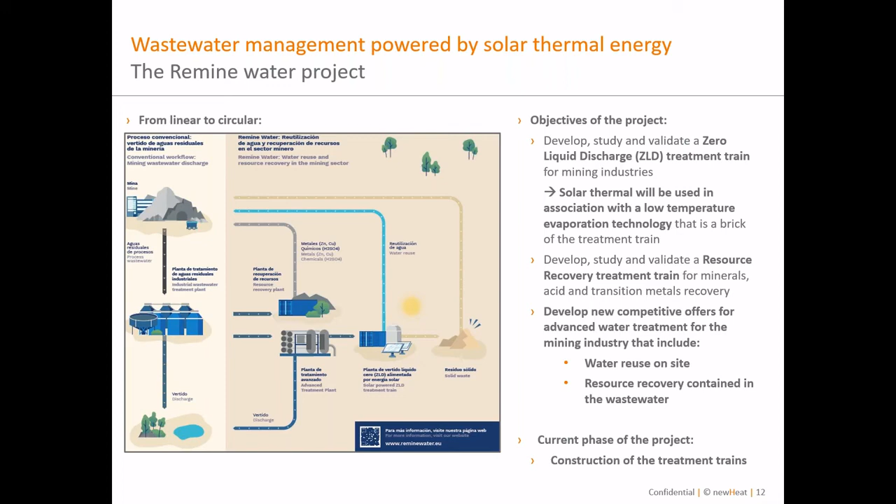So this is it for my presentation. I hope everything was clear for you. Finally, if you have more questions, I'd like to propose you contact us—Pierre, Etienne, or myself—by email or phone, as you wish. I hope you enjoyed it.